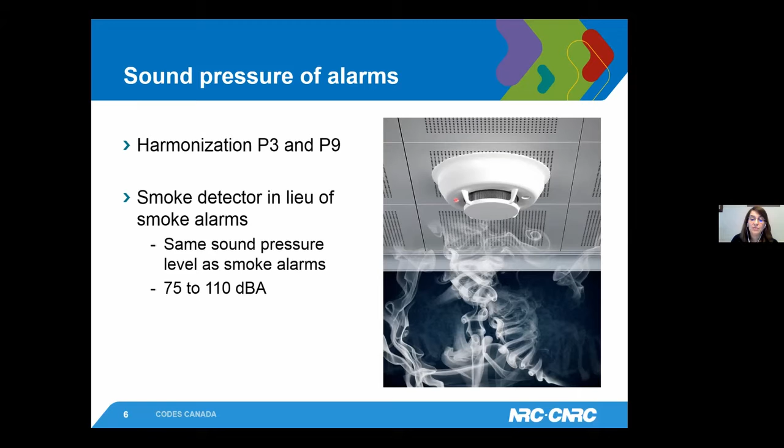So according to the current code, suites of residential occupancies can have smoke detectors instead of smoke alarms if they fulfill a few criteria. One of these is that their sounder base can sound audible signals within the individual suites, but the current code didn't specify what the sound pressure limits were. So this change clarified that these sounder bases are subject to the same sound pressure limits as other alarm signals, meaning they should be between 75 to 110 decibels.

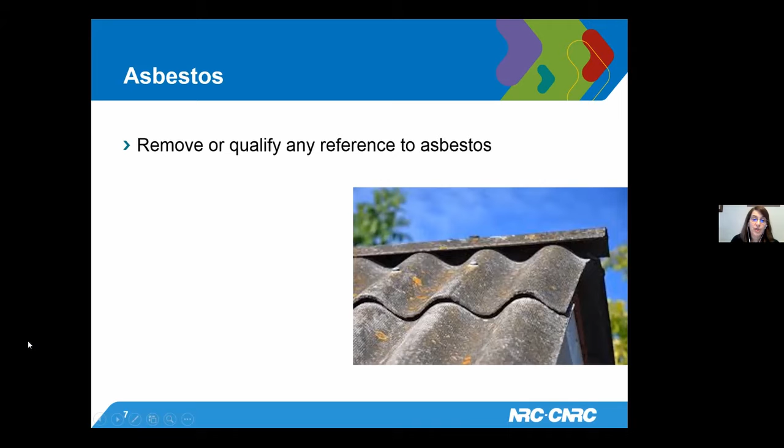The removal of reference to asbestos in the National Building Code: particulate asbestos from building materials can be potentially dangerous and can cause adverse health effects on building occupants and those handling the materials, especially during installation, maintenance, or demolition. These materials could release particulate asbestos when damaged, cut, drilled through, etc. So as such, asbestos-based material should not be used where a person could be exposed to it. And because of this, all references to asbestos in the National Building Code have been removed or qualified. And as we know, Canada banned the use of asbestos as well before this change came into the code.

Safety glazing: mostly I will talk about the wired glass. Wired glass is used by designers in doors and windows, particularly in fire separations. The problem is that there were a number of documented severe injuries resulting from human impact with wired glass in windows and doors, mostly occurring in schools.

So two measures are introduced to limit the probability of human impact. Restrict the use of glazing in locations where human impact may reasonably be expected, and this is in assembly occupancies. This is outside Part 9, but Part 9 houses will be affected, and I will explain this in a second. And also introduced a standoff distance between the glazing and the adjacent walking surface to similarly lessen the probability of human impact with the glass.

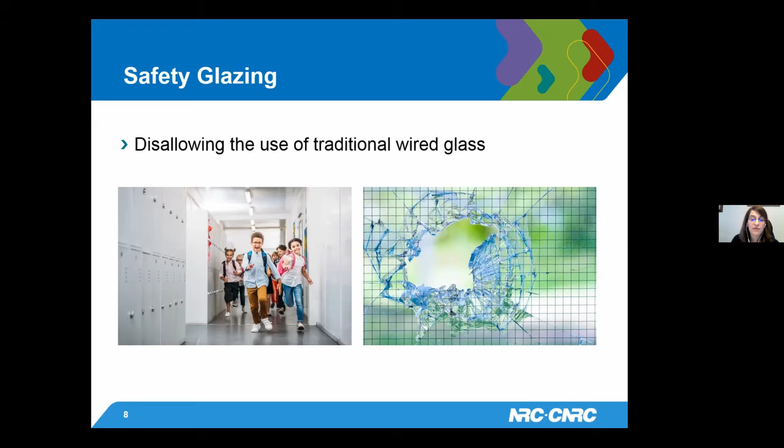But in other occupancies, and this is where Part 9 is involved, dwelling units, for example, the concept of location subject to human impact is not applied. This is for now. And the use of traditional wired glass is not restricted, with the exception for tubs and shower enclosures, meaning that we cannot use wired glass in bathtub and shower enclosures. And the task group on safety glazing has phase 2 for 2020-2025, and we may see other restrictions as well in the coming years.

This task deals with exploring alternatives for providing affordable and safe care in a family-type environment. Right now, except for children's custodial homes and convalescent homes for ambulatory occupants, care occupancies are currently subject to the requirements of Part 3 of the NBC, which requires sprinklers. Sprinklers, along with other design considerations required for Part 3 buildings, increase the construction costs, which affect the feasibility of small care facilities, or the change of use of existing single-family detached dwellings to small care occupancy. So next.

So to allow these facilities, a new subset of care occupancy called home-type care occupancy is recommended for Part 9. As you can see, the existing B care occupancies, B1, 2, and 3, were all under Part 3 of the National Building Code, and they are all based on protect-in-place measures. Meaning that we keep people inside and we try to save them by using sprinklers when there is a fire. And that compensates for the difficulty of conducting a full evacuation of these facilities in a timely manner.

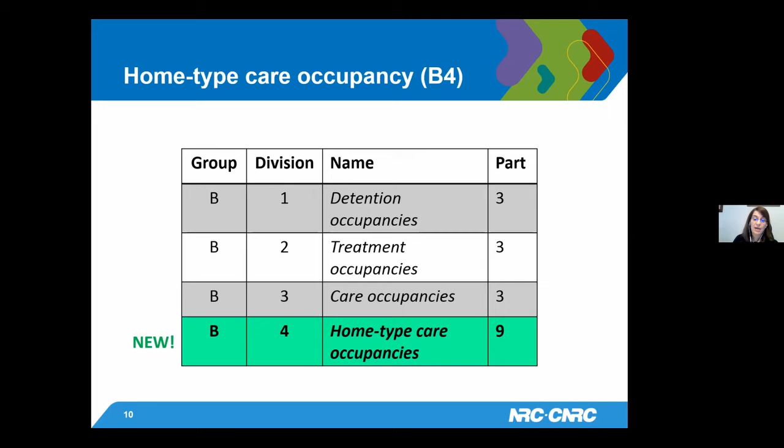It ensures adequate full evacuation of residents in a timely manner. And how? By limiting the number of residents in this new type B4 and their location only to the first floor, by setting requirements to have 2 barrier-free egress paths, including ramps, and by also requiring a fire alarm system and a fire safety plan.

Moving into another topic, protection of windows. So every year across the country, an average of approximately 400 children under the age of 10 are treated in hospital emergency rooms for falls from residential windows, with the majority of falls occurring among children under the age of 4. And approximately 80 to 100 of the injured children are admitted to the hospital for further treatment and require specialized follow-up care. So it has been an outstanding issue at the codes for at least 3 code cycles, but thankfully we now have a new set of requirements.

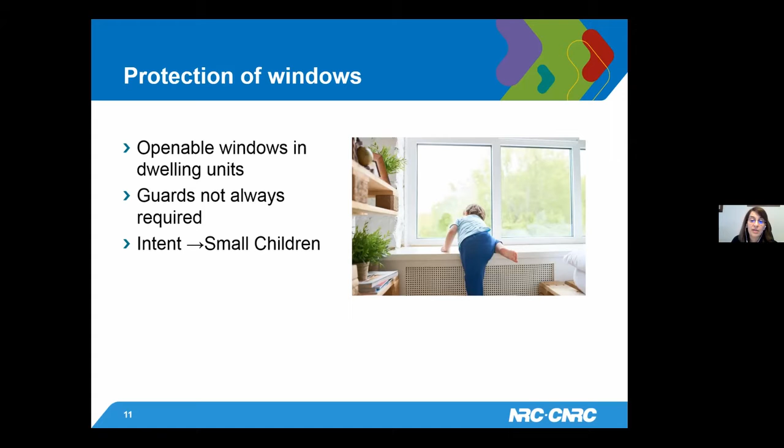The problem is the current NBC requires that openable windows in buildings of residential occupancy be protected by a guard or by a mechanism capable of limiting the unobstructed opening. And this is to minimize the likelihood of small children falling a significant height from open windows. However, this currently existing requirement does not apply to windows in single-family dwellings, meaning that single-family dwellings, row houses, private homes are exempted from this requirement, regardless of the height of the windows, and it has been a problem for many, many years.

A change to be introduced in the NBC 2020 now requires that more openable windows in single family dwellings be protected by guards or control mechanisms. So the exception to the requirement to protect windows is now triggered when the height from the finished floor to the bottom edge of the openable portion of the window is more than 900 millimeters, and 900 millimeters is consistent with other guards requirements in Part 9 of the NBC, or when the height from the floor or ground on the other side of the window to the openable portion of the window is less than 1800 millimeters.

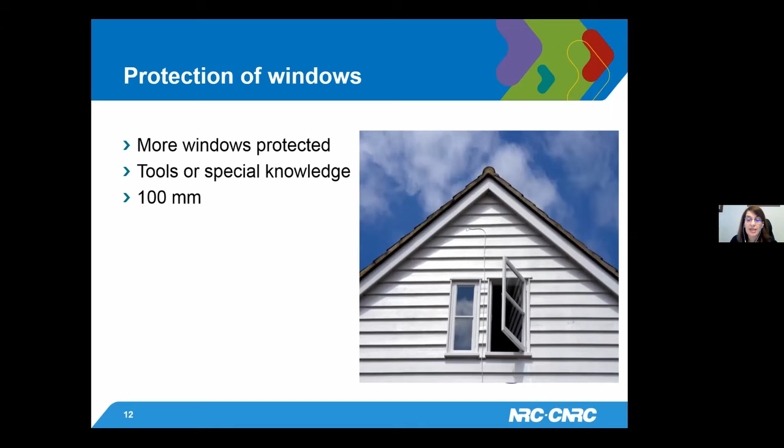Now going into some other changes in stair designs, and I'll start with the open risers. Open risers are common architectural features, but can be problematic to some users. People who have some limitations on their mobility, such as leg braces, prosthetics, canes, and crutches, use closed risers to guide them where they place their foot or cane. So closed risers increase the safe use of stairs for many people.

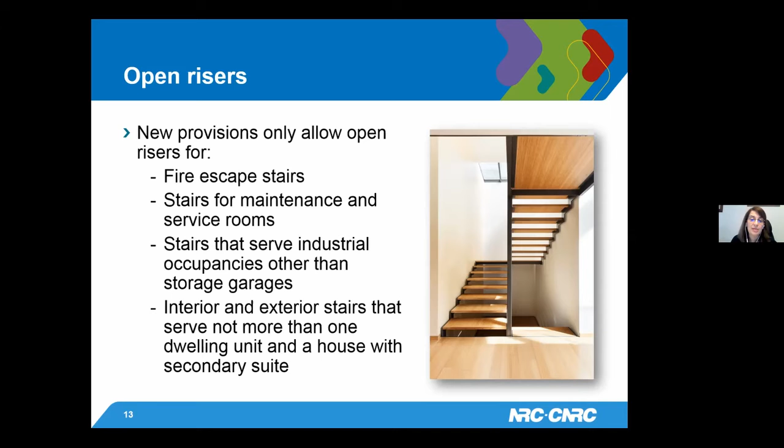The change now limits the use of open risers to certain locations, as you can see on the screen. Open risers will not be allowed in Part 9 public buildings. However, interior and exterior stairs that serve not more than one dwelling unit and a house with a secondary suite will still be allowed to have open risers.

Another stair design in the guard is the open stringers. The limits on the size of the open stringers are not clearly addressed in the NBC. The change sets the limit for the triangular openings formed by the stair riser, the stair tread, and the diagonal bottom element of the required guard, as you can see on the screen in the illustrations. It states that this triangular opening should be of a size that prevents a 150 millimeter diameter sphere from passing through.

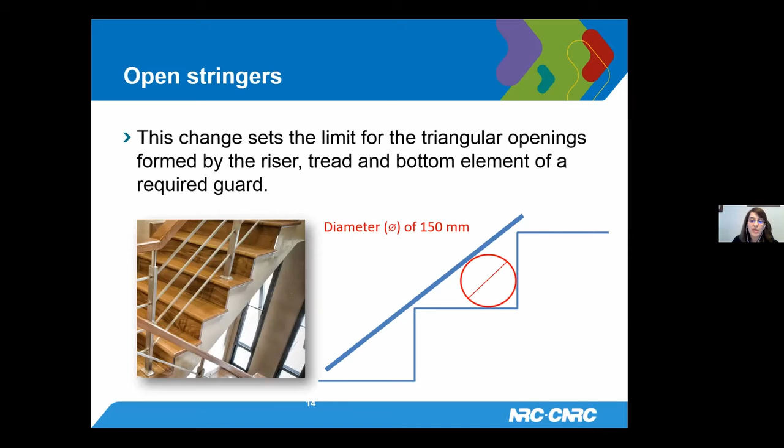And this opening limitation should limit the passage of a 9 to 11-month-old child. So this is also related to falls through a guard or through the openings in the stairs. And this is not an uncommon requirement. The 150 millimeter sphere criteria is currently in place in other codes and standards, such as in the United States and Australia.

The last change that pertains to the stair design is related to the landing. The code doesn't require a landing between the door and the stair when the door swings away from the stairs. And this is because a floor space or physical distance similar to a landing is created by the door swing when someone opens it. And you're going to see it in the coming slides in some illustrations.

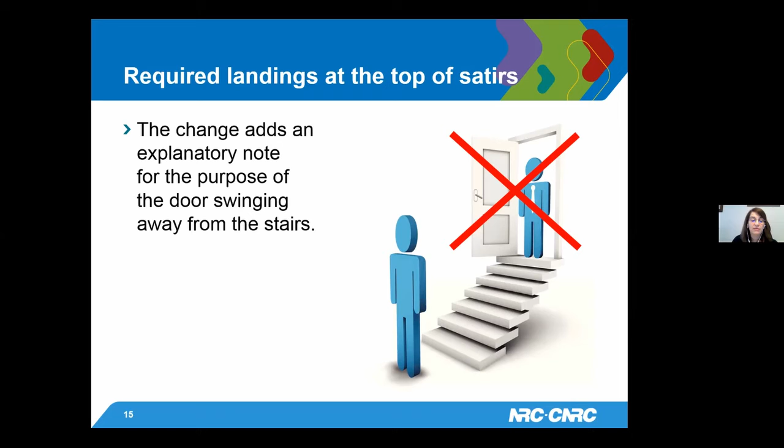This space allows users to back up before starting their descent and provides a distance between them and the edge of the first step. So people would not just open a door into steps and fall over. A new change then introduces an explanatory note to clarify the intent of the code. And by default, this note also means that in case a folding or a sliding door at the top of stairs is used, a landing would be required if determined not to meet the intent of the code.

As you can see in these illustrations, here is where the code doesn't require a landing, because here the dots are people. So people would back up and create this space that would give a certain distance and an eyesight to where the stair starts. Whereas these two situations are very, very dangerous situations. In these, we need to provide landings.

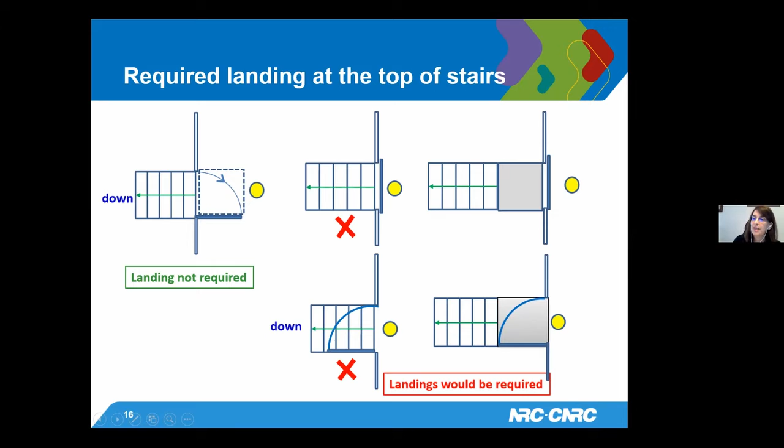So the next set of requirements relate to spatial separations, and I will talk about 3 changes: area of individual portions in the exposing building face, detached carports serving 1 dwelling unit, and some clarification in the terminology. Let's start with the first one.

So this is related to how we can divide an exposing building face of a house into individual portions for the purpose of calculating, for example, the glazed openings. So for the purpose of calculating the maximum aggregate area of glazed openings, the current spatial separation requirements allow the area of the exposing building face to be calculated as the area of any number of individual vertical portions of an exterior wall measured from the finished ground level to the uppermost ceiling.

However, in situations where there are horizontal portions of an exterior wall, for example, a recessed or setback second-story wall, as you can see in these illustrations, this permission was not applicable, and it was demonstrated that this is contrary to the intent of the provision when it was introduced in 1995. The provision back then did not specify vertical portions, but rather stated the exposing building face may be divided into any number of separate portions.

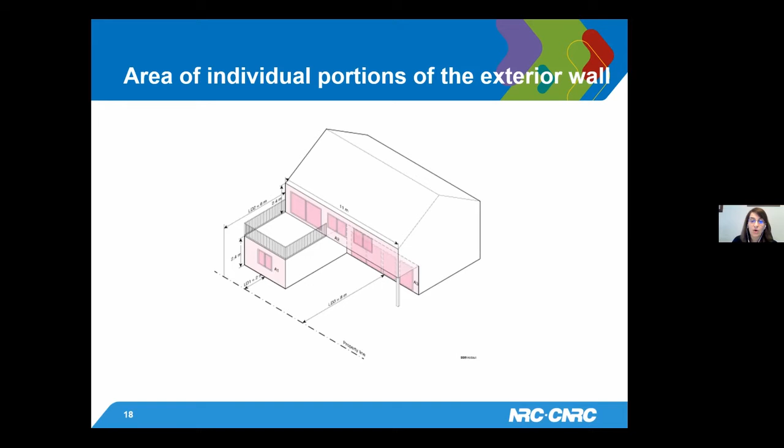The second one is about detached carports. The code is silent about spatial separation requirements for attached and detached carports located close to a property line that serve one dwelling unit. This has led to enforcement problems and inconsistency in the application of subsections 9.10.14 and 9.10.15 to attached and detached carports.

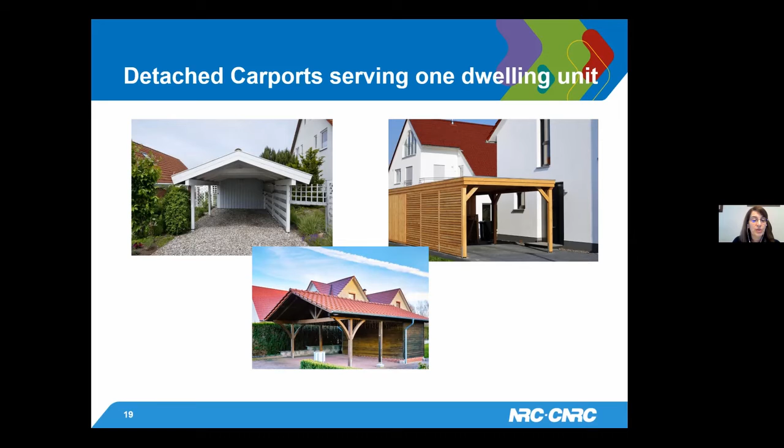This change introduces a new sentence to clarify that spatial separation requirements do not apply to detached carports serving one dwelling unit or a house with secondary suites, and the change exempts detached carports that are not considered as garages as defined in section 9.35 from this spatial separation requirement. Just note that we solved the case for detached carports, but there is still outstanding work with the attached carports, and the work will continue during the coming cycle.

This is a clarification about the terminology used to define public circulation spaces. The terms public way and public thoroughfare seem to be interchangeable throughout spatial separation requirements. The question was, what is the difference between the two terms? It was clarified that the term public way, which is a defined term in the code, and public thoroughfare are different. The term public way encompasses all public circulation spaces, whereas the term public thoroughfare is narrower in its meaning in that it refers only to open public circulation spaces, open on both ends, that allow the flow of pedestrian or vehicle traffic.

So to do some cleaning in the terminology, this change replaces the phrase that we see many times in the spatial separation requirements, the phrase "street, lane, or public thoroughfare." People using the codes should know what I'm talking about. So it replaces this expression with just "public way" in all sentences within the spatial separation requirements.

ICF construction. Six changes have been developed and completed just for this task. It was a big task, but I will just summarize this in one slide. The requirements for using above ground insulating concrete form, or ICF, construction have been limited to single family dwelling units, and this is since 2005. However, a suite of changes has been proposed to remove the limitation to single family dwellings and allow other building types up to 2 storeys to be constructed with above ground ICF walls using prescriptive requirements in Part 9.

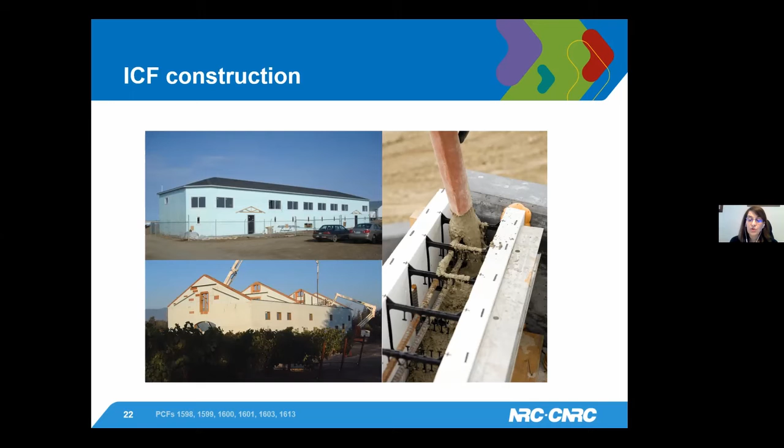Ventilation. I have one change to present here. This change introduces a requirement to prevent the infiltration of exhaust air into roofs through soffits and back into the building through air intakes. And I've heard some sessions about mold and poor ventilation, and I think this is one thing that may help prevent these kinds of problems.

So vents for many bathroom exhaust fans and clothes dryer exhausts are placed within the soffit. The problem with this is that the warm, moist air from these locations, which is supposed to vent directly to the outdoors, can short circuit and discharge into the soffit area, causing potential damage to the roof sheathing, trusses, and insulation. As I said, mold, mildew, loss of insulation R-value, ice damming, and water infiltration are all possible damages.

This change introduces a requirement for an unvented soffit extending a minimum distance on each side of a vent. For dwelling units that cannot meet both the unvented soffit length and the minimum percentage of attic ventilation, the exhaust fan or clothes dryer vent can exhaust vertically through the top of the roof away from the soffit.

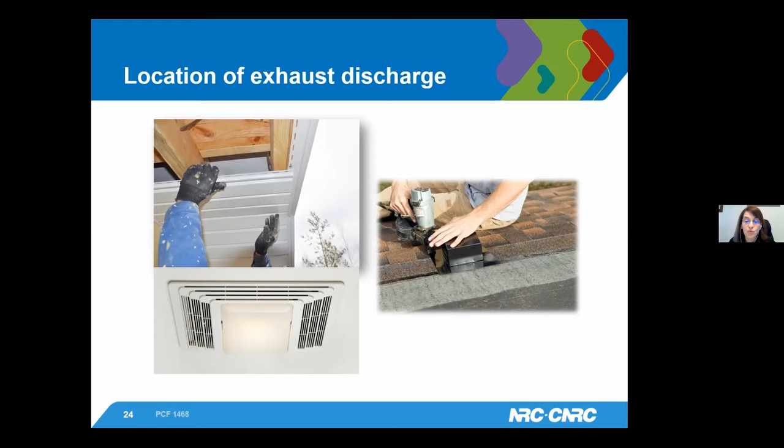Penetrations. Building services need to pass through walls and floors that may be fire separations. The continuity of those separations is maintained mainly by providing protection at the penetration, and the requirements in the NBC for penetrations that require protection are not clear, and they do not align with current industry practices.

Work was done to review and revise the provisions in both Part 3 and Part 9 of the National Building Code, addressing how the integrity of a fire separation is maintained at the penetrations. The changes also align with industry practices. It is anticipated that this package of changes will give designers additional options for achieving compliance while reducing confusion in the industry.

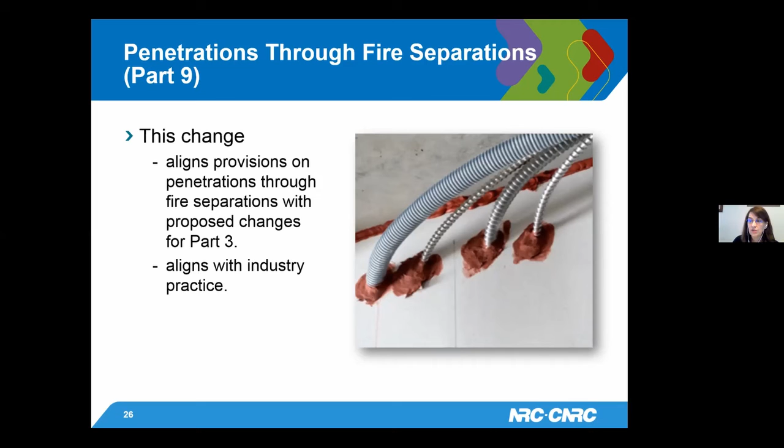The committees were tasked with the review of over 130 reference standards that have been updated, reaffirmed, or withdrawn. The standards development organizations, or SDOs, such as CGSB or CSA, have submitted standard update summary sheets to Codes Canada. And for each updated standard, the SDO provided us with information on the significant changes to the standards, the rationale for the changes, including an assessment of the impact.

And the technical committees, really, they have done a huge work with reviewing all these reference standards and determining whether they are still valid to be referenced in the code, or they should be removed or qualified. So this was really great work in cleaning all these standards.

Accessibility is another big topic. The accessibility requirements in the code in Part 3 haven't changed much for a long time. And addressing this became one of the Commission's high priorities, because through an environmental scan of what other provinces and territories, other countries, and various standards are doing, it was found that the National Building Code was quite behind on accessibility requirements.

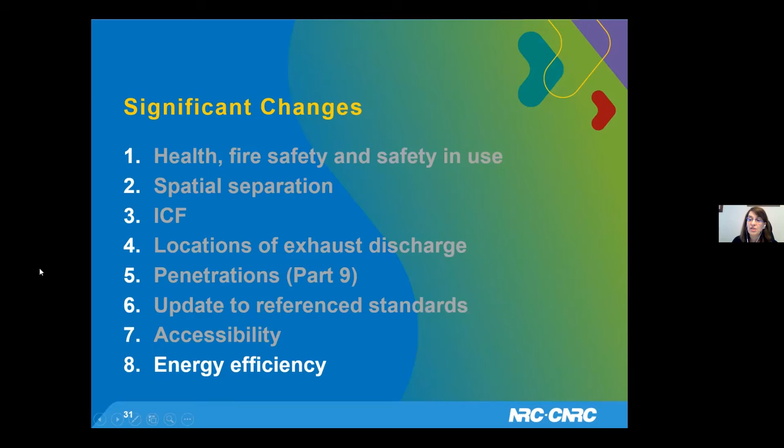The last item on the significant changes is related to energy efficiency. The energy efficiency requirements in Part 9 are not developed by the Standing Committee on Housing and Small Buildings; they're developed by the Standing Committee on Energy Efficiency. So a new subsection 9.36.6 was developed for tiered performance requirements. This will offer increased flexibility to authorities having jurisdiction. It defines 5 tiers as follows. Tier 1 accounts for the current requirements of section 9.36.

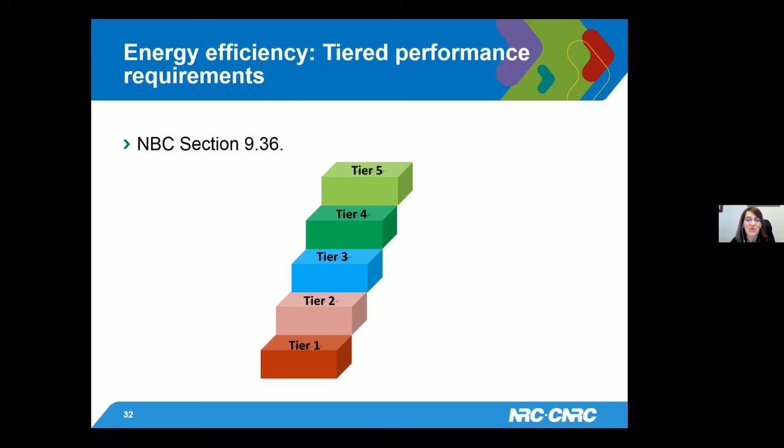Tiers 2 to 5 require percentage improvement accounting for overall building performance and envelope energy performance without exacerbating cooling loads. In addition to that, to supplement the tiered approach, 2 more new subsections are proposed. The first subsection proposes a prescriptive approach for tier 2. This is intended to help code users achieve tier 2 energy efficiency performance while following prescriptive requirements with or without conducting airtightness testing. The second subsection provides guidance to code users on how to measure airtightness when required.

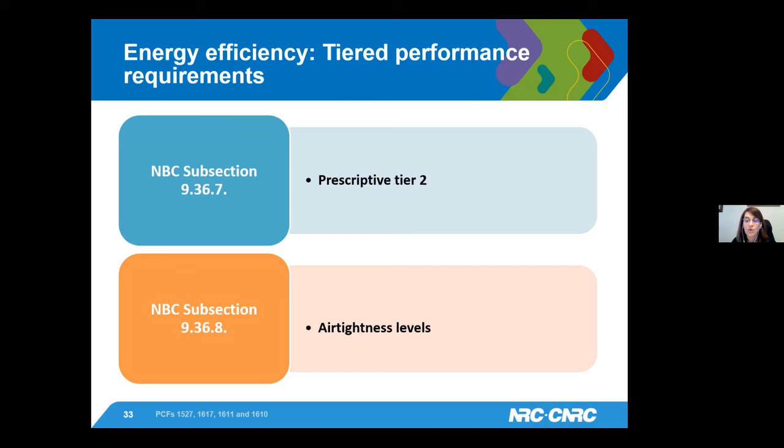It offers flexibility by providing the option to choose any of the commonly used airtightness metrics, meaning air changes per hour, normalized leakage area, and normalized leakage rate.

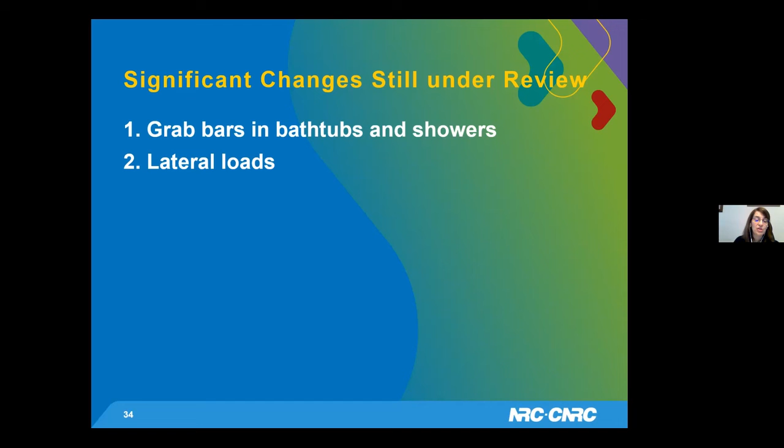So this concludes the presentation on the technical changes that will probably all be included in the 2020 code. There are 2 outstanding items that are still under review: grab bars in bathtubs and showers, and lateral loads. Those are really big tasks. The proposed change to add grab bars in all bathtubs and showers is still at the public review stage. We have received over 340 comments for 2 proposed changes. So we don't know yet if there's going to be anything in the 2020 code on grab bars. Otherwise, the work will continue in the coming code cycle.

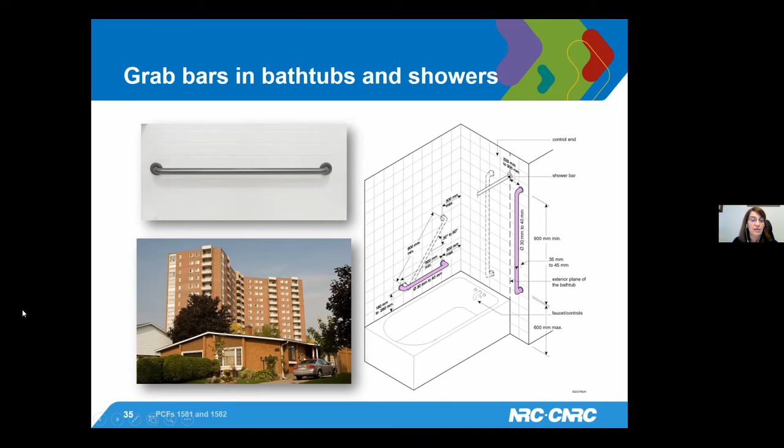For the lateral loads, this proposed change deals with updates to seismic hazard values in Canada. These values tend to change as technology and knowledge improve over time. In some locations, especially in British Columbia, the seismic hazard values will be increased to a level where the current Part 9 requirements do not offer a prescriptive solution.

So to allow houses to be built using a prescriptive approach in Part 9, new and sometimes more stringent solutions are proposed and required now in Part 9. But as I said, it's still under review. The review of public comment is still ongoing as we speak. And we don't know if this is going to be part of the 2020 codes or maybe as an interim change or just postponed to the next code cycle.

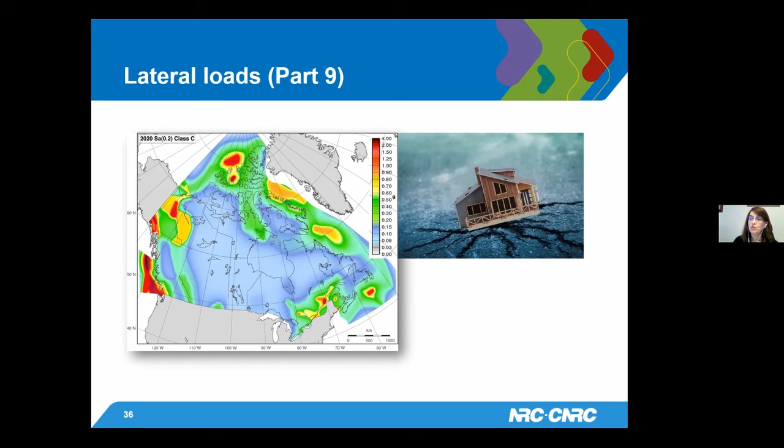published in 2022. And the codes harmonization, this is a huge project that will span maybe multiple code cycles, just started. We call it a reconciliation agreement on construction codes, and the goal is to have more unified codes all over Canada with some specifics for local specifications.